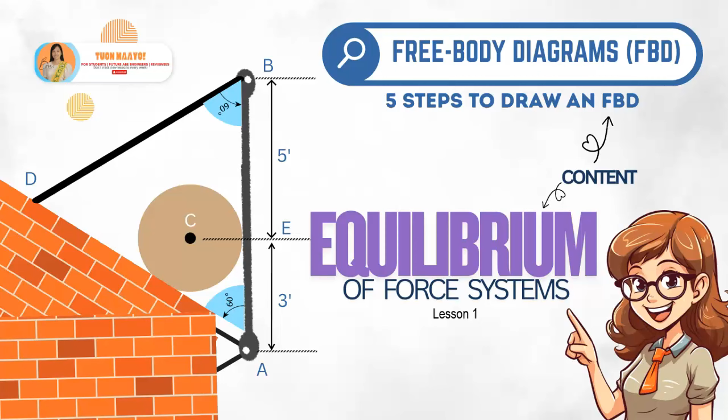Welcome! This series is all about equilibrium of force systems. Pero antes natin hibaluon ang equilibrium, we will learn first how to draw the free body diagrams.

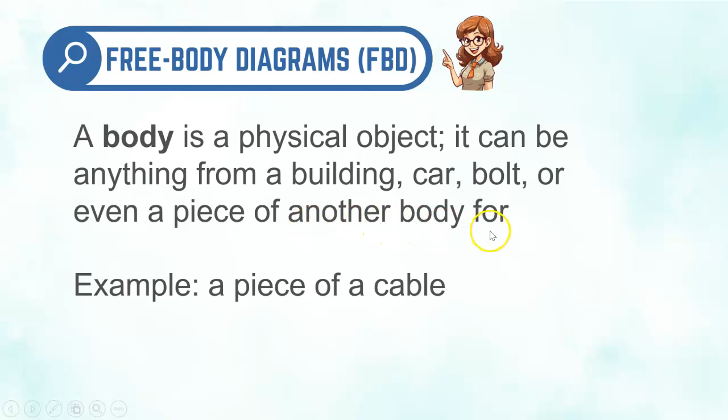So, ang body is a physical object. Pwede na siya nga halin sa isa ka building, a car, or a bolt, or even a piece of another body. For example, a piece of a cable. The free body is just an isolated body. Ito yung body na tinanggal mo sa kanyang mga supports. And this free body diagram is just a graphical demonstration of a free body subjected to external forces.

So sa free body diagram, imo makita ang mga reaction forces, external forces, or applied forces sa sinang body nga imo gin-isolate from the figure or from a system. And this force or couple moments interacting between the free body and its surrounding obeys the Newton's third law of motion. What is the Newton's third law of motion?

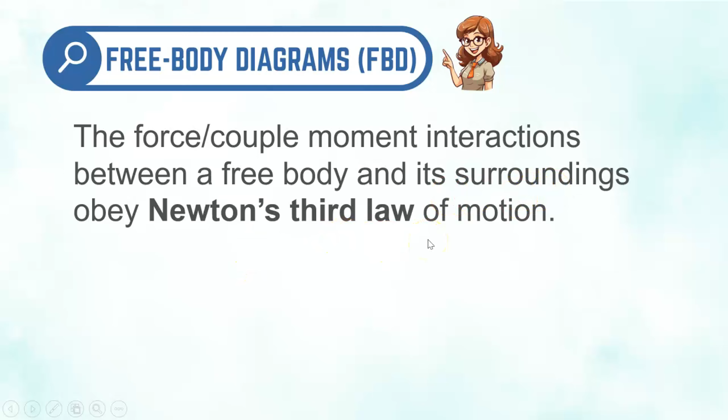For every action, there is an equal and opposite reaction. It says that forces come in pairs. So, ang action force, like this book, pag butang mo sang libro sa table, there is an action force. And the table will give or exert an equal and opposite reaction force. So the forces in this scenario are equal in magnitude but opposite in direction. Because they act on different objects, they do not cancel each other out.

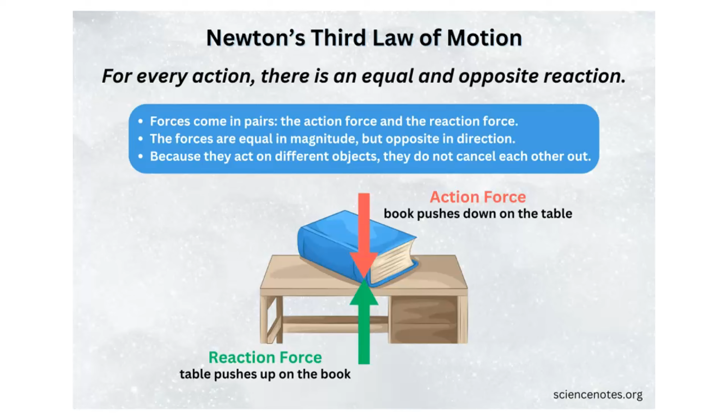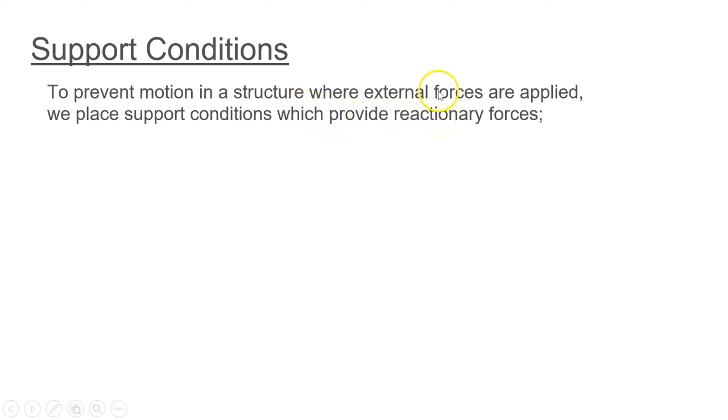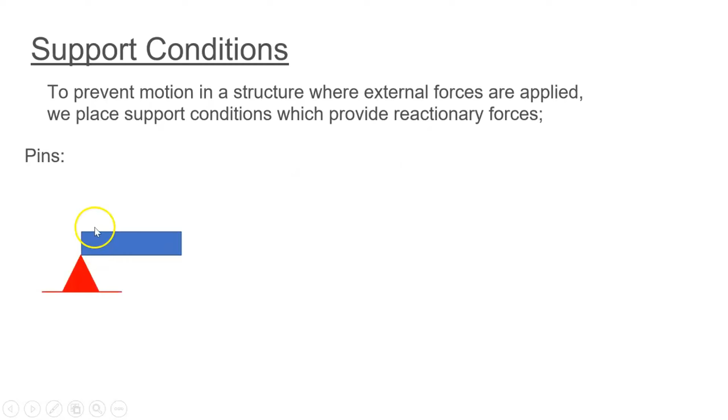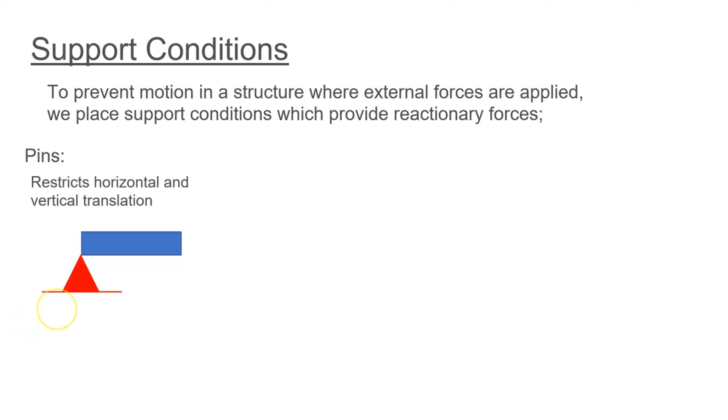I'm going to share to you different types of support conditions, and they are to prevent the motion of the structure, especially if the external forces are applied. So we place support conditions to provide reaction forces. So one is pin, and pins are always gina-represent sang triangle, and this support restricts the horizontal and vertical translation. So kung gusto mo ibutang ang arrow niya, we have an arrow supporting vertically, which is the RY, and an arrow supporting horizontally, which is the RX.

The next support ginatawag nga rollers. So ang mga rollers kalabanan is circle, or hindi gani triangle tapos tatlo ka circle sa dalog. Basta may circle na siya, and that is rollers. Ang rollers can only resist or restrict horizontal or vertical translation. Hindi pwede duwa. Hindi pwede horizontal and vertical. Meaning, either lang da. And it is always perpendicular to the roller. What if kung ang roller ta is naga-inclined? So therefore, masabay ang aton nga arrow kay dapat perpendicular ang aton nga reaction force.

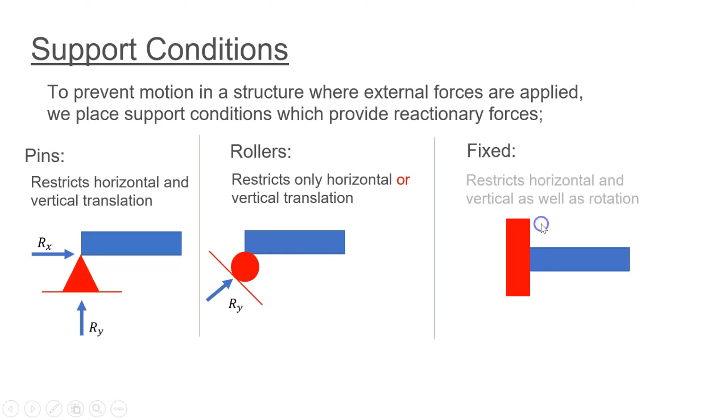Next is the fixed. So ini-example siya sang fixed, either isa ni ka wall and this is a cantilever beam. In the fixed supports, gina-restrict na diri ang horizontal and vertical as well as the rotation. So it means we have the RX preventing the motion and we have the RY preventing its translation going up or down, and as well as a moment that prevents the structure to rotate.

For example, we have here a simple beam supported on the left side or in point A with a pin and on the point B with a roller. So first is ating i-free ang beam na ito. So magiging free body na ito. Amo na ning ginatawag ta nga free body. Of course, dapat ibutang tagid ang mga external loads or external forces like ining mga concentrated loads P1 and P2. Then after that, we will convert the supports into reaction forces.

So first is ang pin. So the pin can restrict horizontal and vertical translation, so amo ni ang itsura niya at point A. And since ang roller, in this case, maka-restrict lang siya sang vertical translation perpendicular to the roller, amo niya ang aton nga arrow. So this is an example of free body diagram wherein makita nimo ang mga external forces and reaction forces acting on our free body.

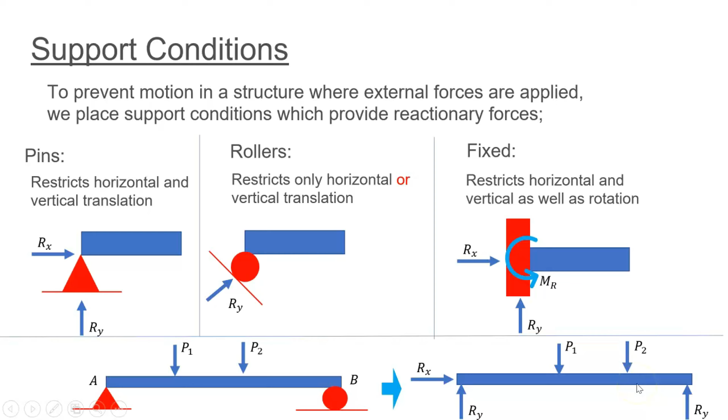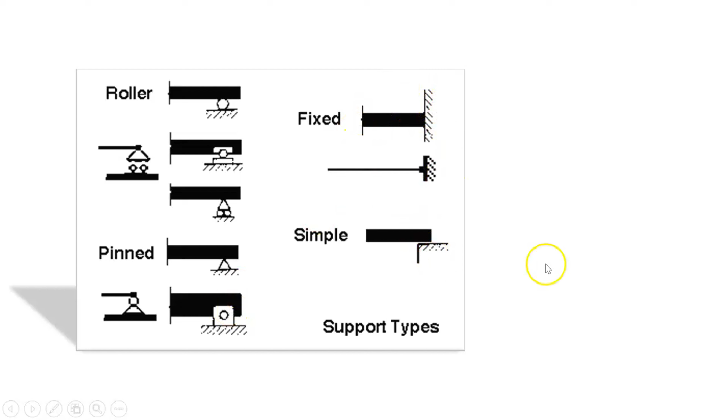Amo ni ang mga example sa problem. If makita nyo ni nga mga itsura, may mga circle that is a roller. And this is also, if makita nyo ni, amo na siya ang pin, this is ang fixed, and this is the simple support. So these are the different types of support. Pwede nyo lang ni basahon, just pause the video para magdugang inputs.

So for example, ini nga figure ato ni i-try nga ihimuan sang free body diagram. So first thing nga himuon is i-isolate nimo ang part sang figure nga gusto mo i-analyze. For example, gusto ko mabalaan ang free body diagram at joint B. So I'm gonna cut this joint and akon ipangbutang ang mga arrows. So this cord will have a tensile effect. This part of the cord will also have a tensile effect, and this cord is a tensile effect.

Once cord gani or rope, ang aton nga force is tensile. So hindi ta na siya mabutang nga normal. After that, hindi gid kalipatan ang mga slopes nga na-indicate sa aton nga figure like this 3 and 4 and the angle. So the angle here is 60.

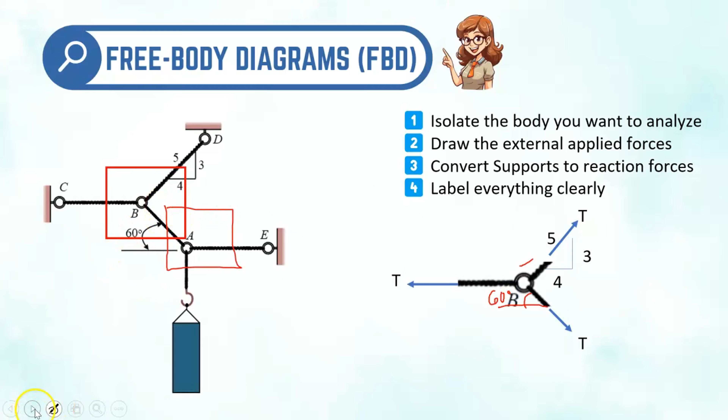Muna siya. What if gusto ko naman i-cut ang joint A? So, ipagwata na siya liwat, i-free naton, and that is our free body diagram. This is our free body, and we will draw the external applied forces and convert the supports to reaction forces.

So, our external applied force is this weight. Since nga weight siya, this can be written as mg, mass times gravity, and our arrow is going down. And then, since na cord mani siya, kag cord mani, we will indicate that this is tensile. And don't forget to put the

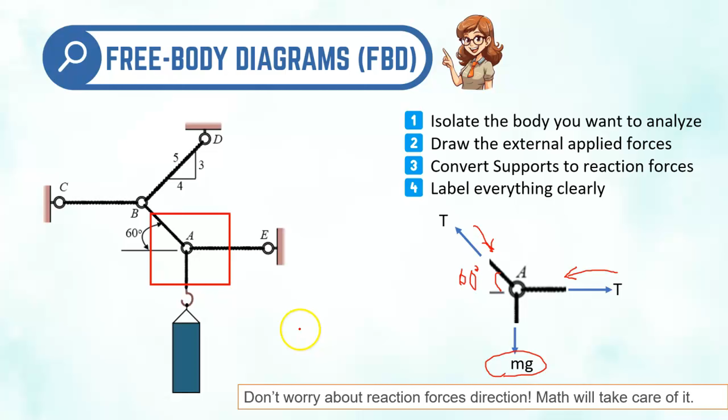angle. Okay. What if, kung sala ang aton nga arrow, what if dirita bigin butang, and this, or this one, ang aton nga mga tensile force or reaction forces, don't worry about reaction forces direction because math will take care of it. Ipakita ko na karon sa inyo later.

So, for example, we will try to draw the free body diagram and we will solve this figure using equilibrium. So, first is i-isolate natin ang simple beam and ara na upod ang iyang mga forces and distances. Then, we will convert our supports. So, since this is a roller and it is flat, it can only resist vertically, so BY. And then, here is our pin, vertical and horizontal, ang pwede niya ma-resist.

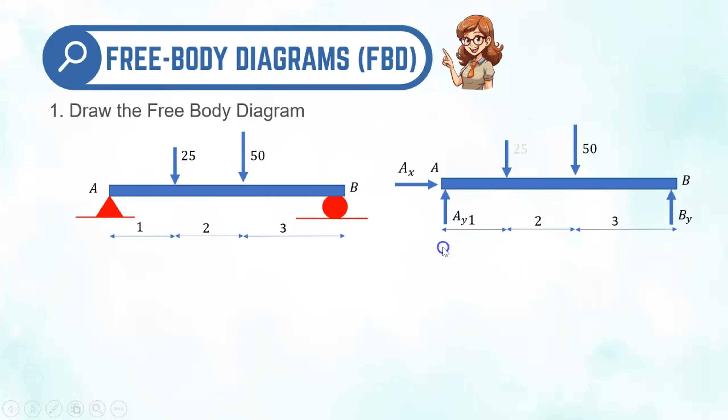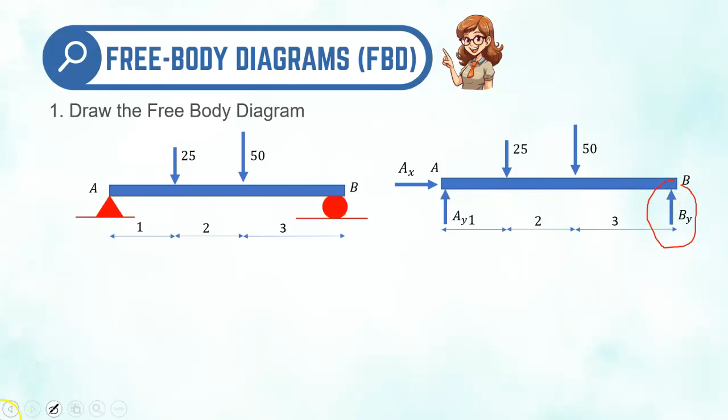After that, we will try to solve for the support reactions. Kung pila si BY, drata na mahibalaan using the equilibrium. Diba, naka-going up ini ang aton nga BY. What if ihimuon ko na siya nga going down? What will happen to our answer? Take note, if your answer is negative, it means kinanglan mo lang nga i-flip ang imo nga arrow. Kung naka-downward siya, kag ang answer naton is negative, i-upward ta na siya. Basta maintindihan nyo lang na later.

Before solving it, let me define equilibrium. The body is said to be in equilibrium if the resultant of all forces acting on it is 0. Diba, amo ni magkuha sang resultant. Dapat, para mangin equilibrium siya, ang aton resultant is equal to 0. So, paano mangin 0 ang resultant? So, ang aton nga summation of Fx should be what? 0. And our summation of Fy should be 0.

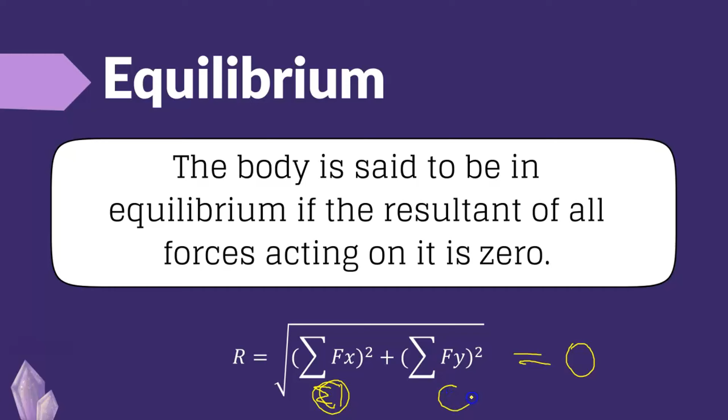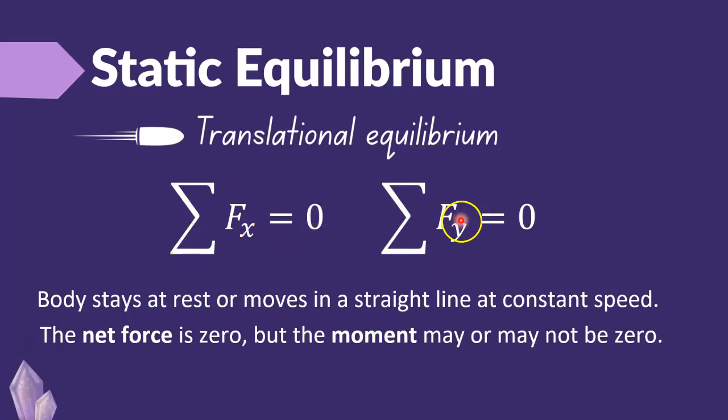Before naton mahambal ang isa ka body is in static equilibrium, dapat ma-met niya ang translational equilibrium and rotational equilibrium. So, translational equilibrium, body stays at rest or moves in a straight line at constant speed. Meaning, wala sang acceleration nga nagakatabo. If there is no acceleration, our net force is 0, but the moment may or may not be 0. To make sure that it is translational equilibrium, all forces at x should be 0 and all forces at y is also 0.

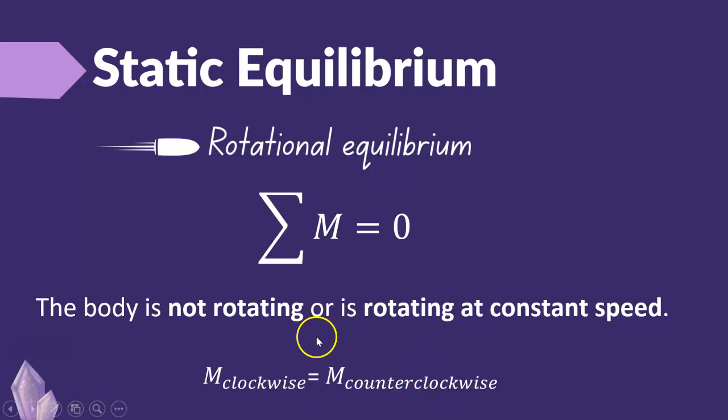How about the rotational equilibrium? So, rotational focuses on the moment, right? The body is not rotating or is rotating at a constant speed. It means there is no acceleration also because the speed is constant and the summation of moments should be equal to 0. Paano mangin 0? The moments at clockwise should be equal to the moments at counterclockwise. If this is positive 100, this is also positive 100. Para maging 0 ang aton nga moment if i-transpose ta na sa piyak.

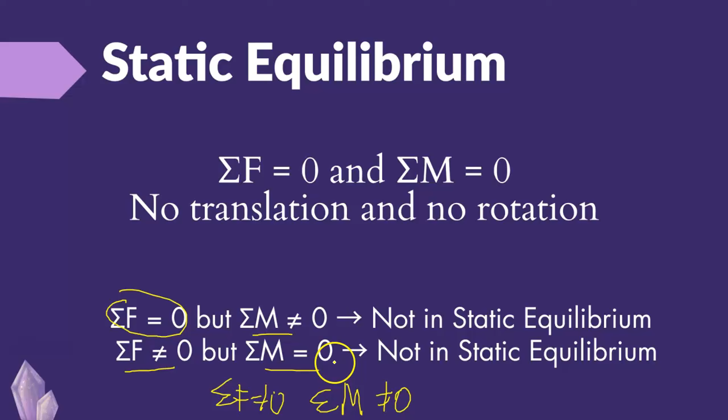Ma-consider ta lang ang isa ka body static equilibrium if ma-met niya ini nga kondisyon. There is no translation and there is no rotation. If may ara kita nga translation kag wala rotation, hindi na siya gyapon static equilibrium. Pag wala naman sa translation kag may rotation, hindi man siya gyapon static equilibrium. Dapat wala kita sang translation kag wala man kita sang moment or rotation. That is static equilibrium. A body is in static equilibrium when it is in both translational and rotational equilibrium at the same time. Take note na ha.

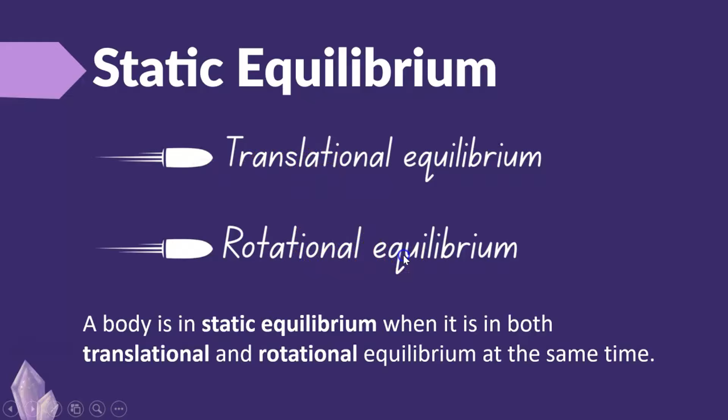Try na naton nga sulbon ang ini nga figure. So since nga aton ginpadalom kagina si BY, we will try to find it using equilibrium. And para nga mangin equilibrium, kinanglan nga ang aton summation of Fx is equal to 0, Fy is 0, and even our moment should be equal to 0 para rotational equilibrium and translational equilibrium ang aton nga ginaobra. Let's go first sa Fx. Since isa lang man ang aton diri nga arrow along the x-axis, which is Ax is equal to 0. And then si summation Fy.

Tanan nga ara sa y-axis. First is Ay. Since nga upward arrow siya, positive ang aton nga Ay. Minus 25 kasi downward arrow. Minus 50 and minus BY. As you can see in this equation, duwa ang aton unknown. Sumabudlayan kita magpangita kay BY. Let's ask help kay moment. So at moment A,

25 is aton i-multiply sa distance since nga ang moment is force times distance. Positive na siya because, let us assume that clockwise is positive and counterclockwise is negative. Okay, so positive 50 times its distance 3 from point A, and lastly the BY, which is also positive, times 6, equal to 0. So BY, kay isa aton unknown, BY is equal to negative 35 down. So as you can see, my answer is negative. Therefore, BY should be upward.

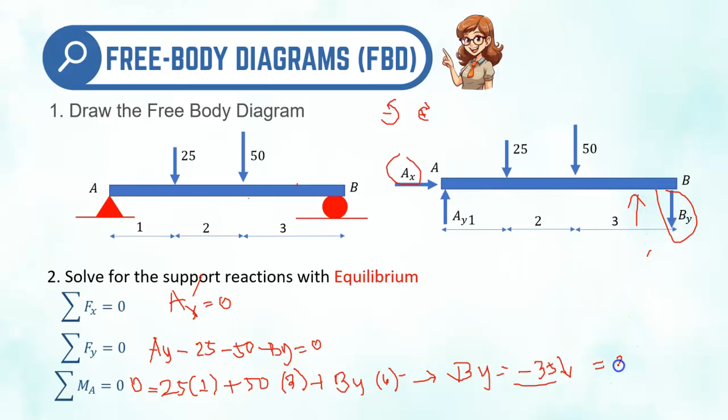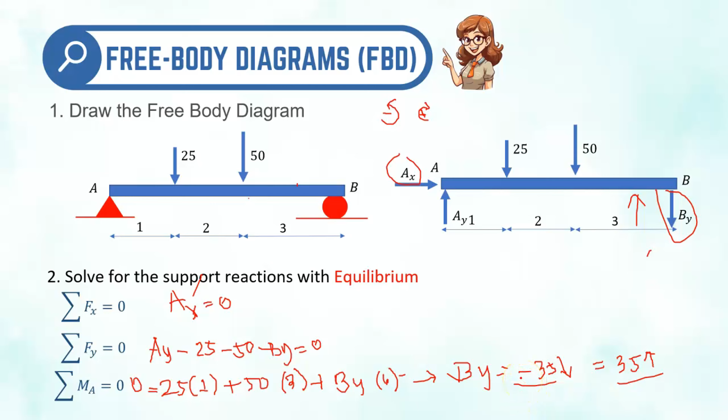To correct our answer, dapat ang final answer naton is 35 arrow upward. So, di ba? Don't worry about the direction of the reaction forces kay mathematics can take care of it. Once gani nga negative imo answer, means you have to flip the arrow para nga makorek.

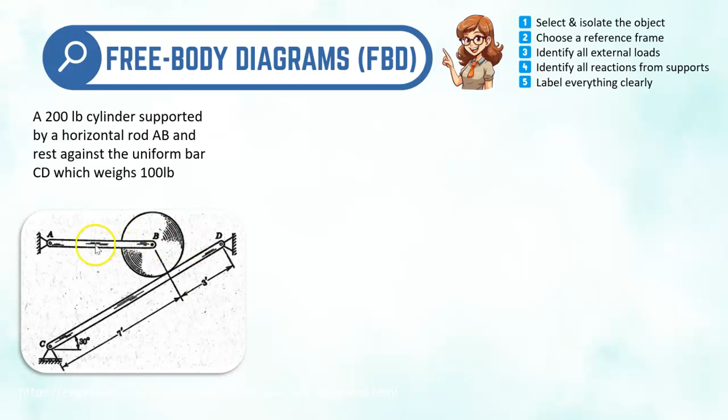Let's have another example. A 200-pound cylinder supported by a horizontal rod AB and rests against the uniform bar CD which weighs 100 pounds. So tatlo ang aton nga object diri. We have the rod AB, the cylinder, and the rod CD. So kung imo lang tan-awon ang figure kabudlay tuod, pero pasimplihon ta na by making free body diagrams. We will isolate them, ang tatlo, like what I am doing here, and then we will choose a reference frame. So this would be my X and Y.

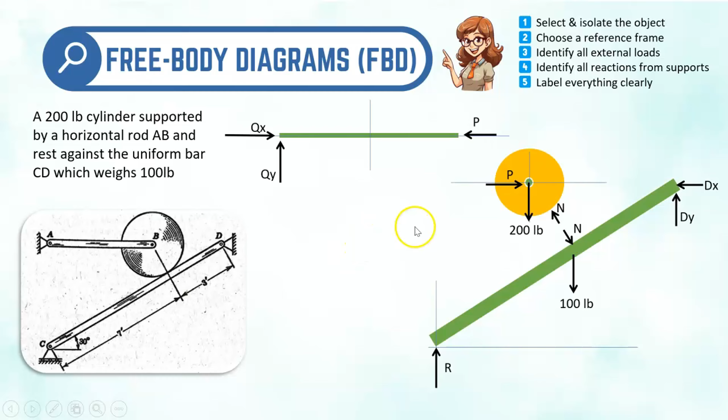Now, I have a challenge for you. Kinanglan ninyo nga himuan ini sang FBD. So, just pause the video and then i-try ninyo sa inyo nga papel.